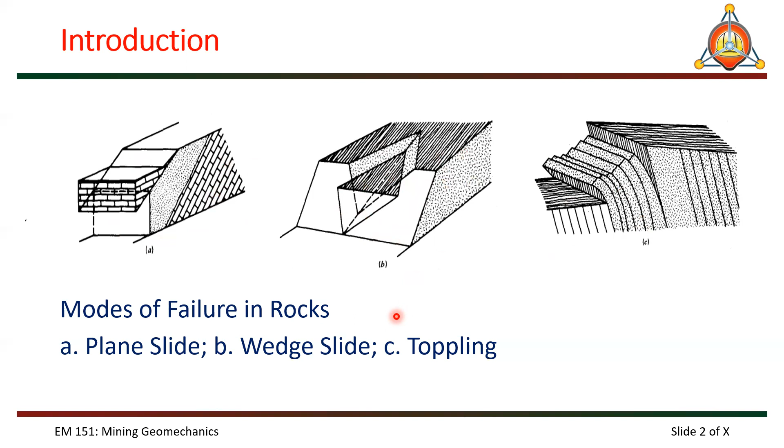This is where our kinematic model analysis comes in. Because when there are sets of discontinuities, we use kinematic analysis to anticipate or somehow predict the likely pattern of possible slope failure.

Let's discuss one by one the modes of failure in hard rock. Let's start with the plane slide. In order for a block of rock to slide along a plane, these are the conditions: when a rock rests on an inclined weakness plane that daylights into free space.

What do you mean by daylights? It means it's not hidden. Like this one, see - this block, if you can see, really comes from here, so it's really connected there.

But since this is a discontinuity, a plane of weakness, then it can move downward - it can slide here. This is because there is free space below it. If this space is blocked, of course it has no space to move, so it won't move.

So it only moves when there's free space. And the inclination of the plane of slip must be greater than the friction angle of the plane. Friction angle is a property of the rock. So if the inclination or the steepness of this plane is greater than the friction angle of this rock, then that means it can fail or slide.

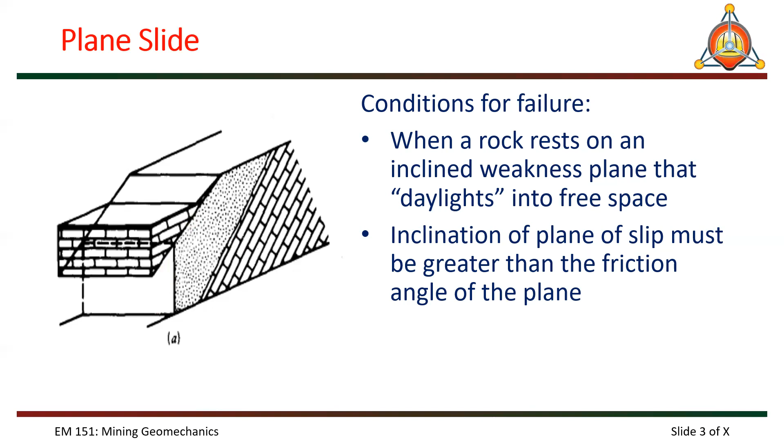Next, we have wedge slide. For wedge slide, the condition for failure is when two planes of weakness intersect to define a tetrahedral block. So this is a tetrahedral block, and its two planes of weakness are these.

First, this one, which dips in this direction. Wait, let me draw. So this is the first plane of weakness - it extends here, and then it dips towards here. And the second plane of weakness is this one - it extends here, dipping in this direction.

So if these two planes of weakness intersect, then they form - since the intersection of two planes is a line - they form this line. And if they form this line, then they can form a tetrahedral block that can slide downward.

And the second condition is when the line of intersection daylights into the excavation - so there should be no barrier, no barrier rock there, because if there's a barrier, the tetrahedral block can't move or slide down. And it should also be sliding downward, because if it goes toward the other side where there's still intact rock, then it won't slide down. So those are the two conditions for failure of wedge slides.

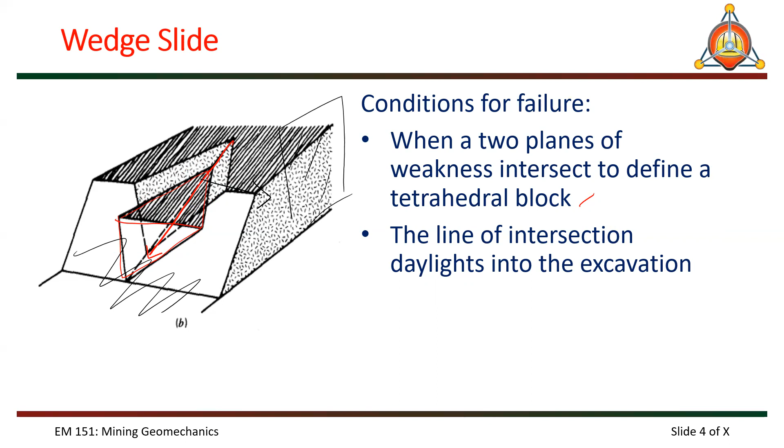Okay, next is toppling. The conditions for failure are these two. First, it involves overturning of rock layers inclined steeply into the hillside. So our rock layers, as you can see here, look like a loaf of bread. We have a block of rock, and the incline is steep, almost vertical.

The second condition is that layers tend to bend downhill under their own weight. If the layers are heavy enough that they can't support the weight of the one next to it, it will bend downward. So the first few layers are the first to bend. Since nothing supports the weight of the one beside it, even if it's still upright, since the others have already bent, it will also tend to bend. Then one after another, until we have a toppling failure.

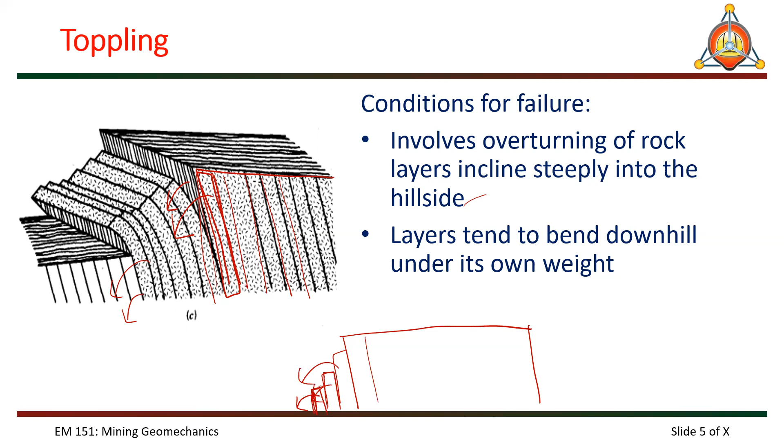That being said, let's discuss kinematic analysis. What is kinematics? Kinematics is the motion of bodies without reference to the forces that cause them to move. So here we focus on the directionality of our rock layers.

Many rock cuts are stable even if they are on slopes, even if they contain steeply inclined planes of weakness, and even if the rock strength is low. This happens when there is no freedom for the block of rock to move along that weak surface. As I mentioned earlier, it only slides if there is no barrier. If there is a barrier, it will stop the block from sliding down. So even with low rock strength and a very steep incline, it may still not move.

It is only when we remove that blockage that it has the potential to fail. So our analysis here, using kinematic analysis, will focus on the directionality of this discontinuous rock to make sure there is always a blockage to prevent potential failure blocks. We won't focus yet on the strength of rocks in this section.

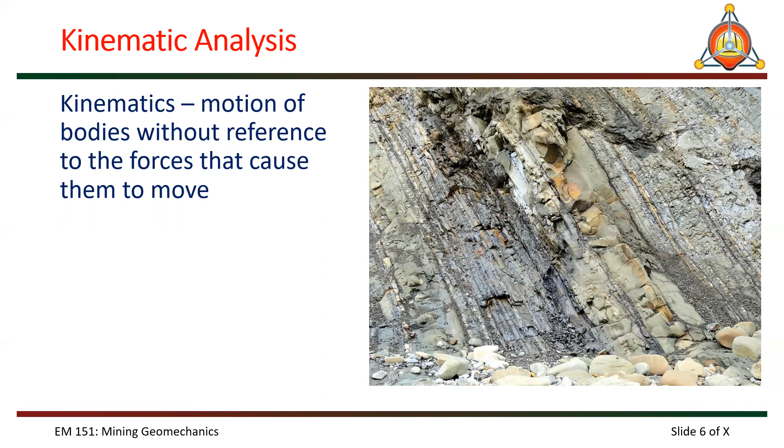To do kinematic analysis, we must be familiar with these basic line elements in the rock mass: the dip vector, normal vector, and intersection vector. There is a separate lecture detailing these elements and how to represent them on the stereographic projection, so you might want to review that. Let's review these three basic line elements.

We have the strike and dip for our planes of weakness. The strike and dip have two elements: the strike vector and the dip vector. This is the strike vector, lying on the great circle. And this is the dip vector, pointed down the dip of a weakness plane. If you have a weakness plane, here is your strike, and your dip is pointed downwards on your weakness plane, bearing at right angles to the strike and plunging with angle delta from the horizontal.

From the horizontal, the angle is delta. We also have the normal vector. The normal vector is pointed in the direction perpendicular to the plane of weakness. So if this is our plane of weakness, the normal vector is pointed towards it. Let me change the color.

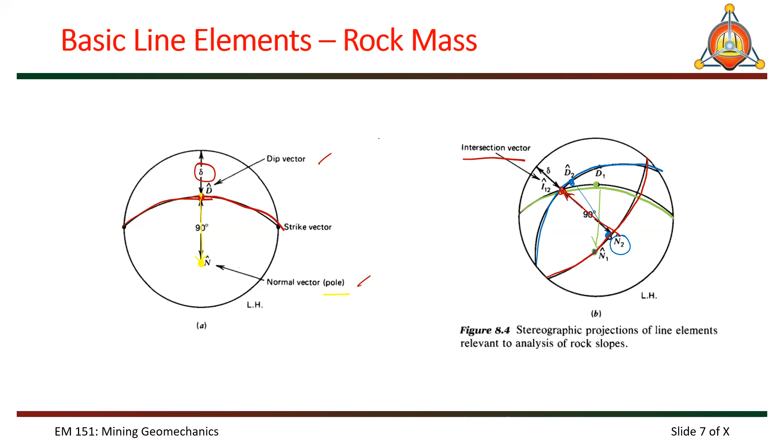So once these are known, the dip vector, the normal vector, and the intersection vector, then we can do the kinematic analysis for rock slopes.

All right, so let's go now to the kinematic test for plane failure. The requirements for sliding in plane failure: first, there is a space to which the rock can move, and second, the angle of our cut, alpha, must be greater than delta, which is the angle from horizontal of the plane of weakness. So sliding requires alpha greater than delta and no blockage.

So in the stereographic projection, how do we put these requirements? First we draw the great circle of the cut slope. So this is our cut slope, and this is a plane, which we can represent in the stereographic projection.

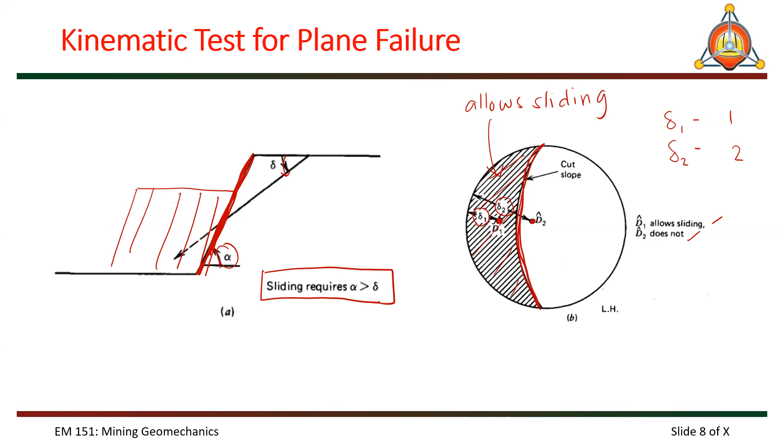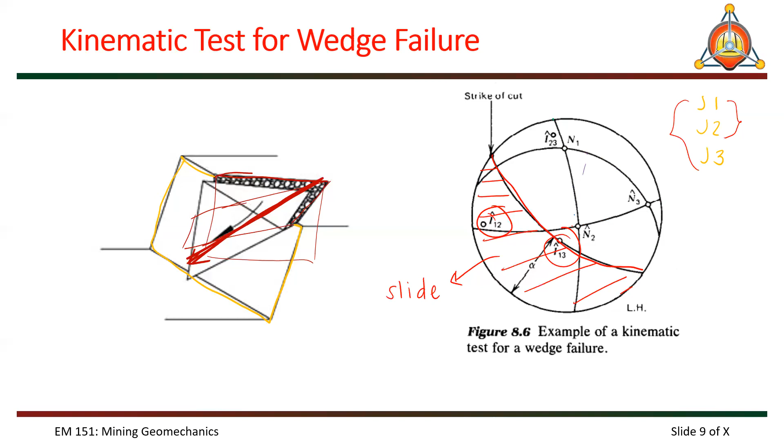So these shaded regions have the potential to slide. What's here? The intersection of 1 and 2, and the intersection of 1 and 3. So the joint set pairs 1 and 2 can fail, causing wedge failure. And 1 and 3 also can cause wedge failure. So the combination of 2 and 3 is safe for wedge failure. Okay, that's it.

And lastly, for toppling failure, interlayer slips must occur before large flexural deformations can develop. So sliding will occur in this plane if this condition is satisfied: 90 minus delta plus phi sub j should be less than alpha. This alpha here is the slope from the horizontal of our cut slope.

And phi sub j is just the internal angle of friction. Then delta is just the angle from the horizontal of our layers. Usually these layers are parallel to each other since it's one set of discontinuities, so this delta should be the same throughout. So again, sliding will occur if 90 minus delta plus phi is less than alpha.

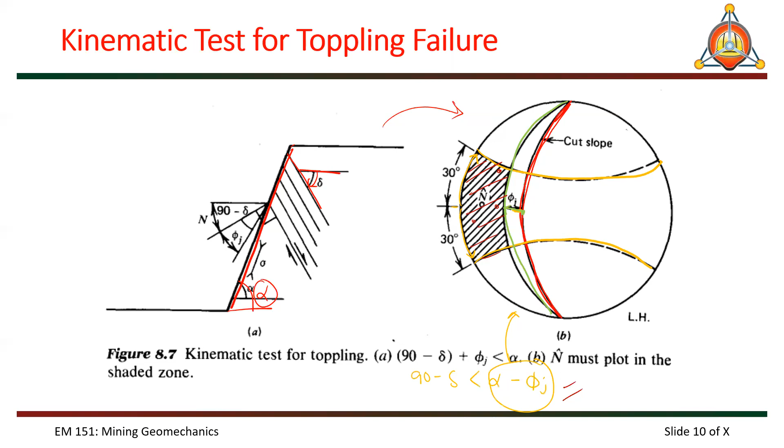Okay, so again, the steps: first, gawin mo na yung great circle of the cut slope, then gawa tayo ng small circles na 30 degrees within the cut slope. Then gawa tayo ng great circle also ng phi galing sa cut slope, and i-shade natin yung part na to. So that's for toppling failure.

Lastly, for sliding due to self-weight: failure can occur if yung surface natin dips steeper than the internal angle of friction, yung phi sub j natin. For wedge failure, any roughness of the planes of weakness adds considerable strength, so in fact it can often incline considerably steeper than phi sub j without wedge failure.

Okay, so to do the test: for sliding, ito yung gagawin natin, and for toppling, ito. For sliding, una natin gagawin is to draw a small circle of radius 90 minus phi, yung ating internal angle of friction. From the center, determine natin kung saan yung 90 minus phi, then using your compass, mag-draw ka ng small circle around it. Yung outside the circle contains all lines plunging less than phi sub j, so walang failure na mangyayari dito. Yung inside the circle, dito yung failure.

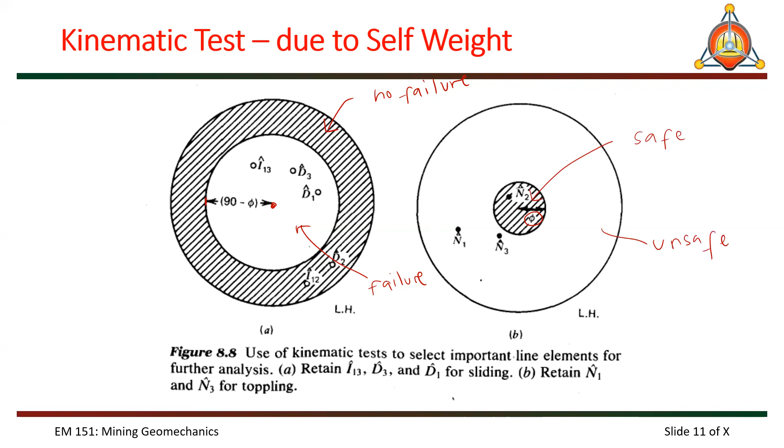So, kinematic analysis can be done. Isa sa mga actual application ng kinematic analysis is in an open pit mine. Since we are excavating in different directions, lahat ng directions mapupuntahan natin kasi yung ating pit ay pa-circle usually. So there would be parts na more prone to a certain type of sliding than others, depending on the direction of our discontinuities na present. If we perform the analysis on those different directions, we can notice na our pit will have different minimal or maximum safe slope angles.

So in this example, yung assumption natin is circular yung pit shape natin. Although usually hindi naman to nangyayari na perfect circle talaga, pero just for the sake of illustration, yung ginawa dito is from the actual north na direction, nag-move yung analysis 15 degrees clockwise or counterclockwise, until makabalik siya sa north. So meron tayong 360 over 15 na number of analysis na ginawa.

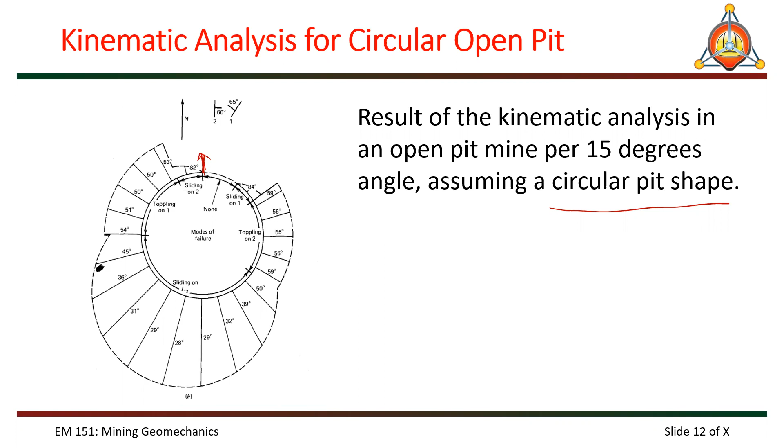At each of those parts, ginawa natin ng sliding, plane sliding, wedge sliding, at toppling na analysis. Tapos tiningnan yung safe angles or minimal safe angles, and from that, tiningnan kung ano yung maximum na safe slope angle of that specific direction. So ito yung parang tabular form of the data.

So we have here dalawang joint sets. Joint 1 strikes daw at north 32 degrees east, and the other joint strikes north south. Tapos we have here our dip vectors, and also our intersection vector. Lahat ng ano doon, so we have north, 15 east, etc., until bumalik sa, until na tapos niya yung full circle - parang different directions all throughout the circle with interval of 15 degrees.

In-analyze niya yung for sliding, for joint set 1, for sliding also ng joint set 2, and then for wedge sliding naman ito kasi intersection na siya - wedge sliding due to 1 and 2, toppling for 1, and toppling for joint 2. Tapos tiningnan natin dito kung ano yung angle sa lahat ng to, sa lahat ng analysis na ginawa per direction, per strike of cut direction.

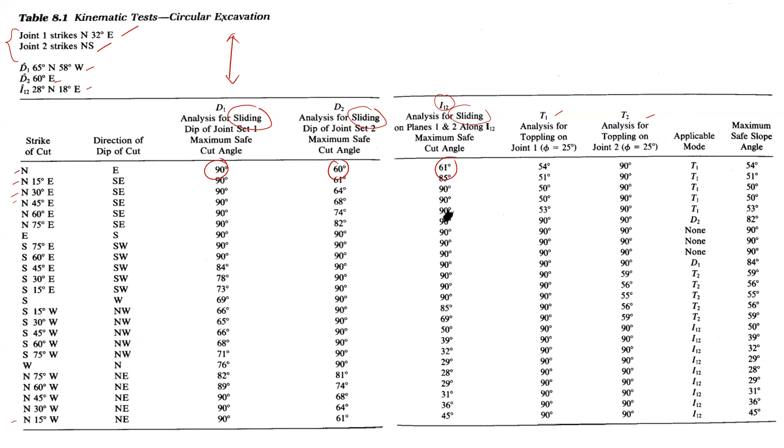Tiningnan kung ano yung pinakamaliit na safe slope angle. For example, dito sa north, meron tayong 90, 60, 61, 54, 90. So ano yung pinakamaliit sa kanila? Eto, di ba? So most likely, kung meron mang failure sa strike na to, na north, then most likely yung unang failure na mangyayari is the toppling on joint 1. So that's why yung applicable mode dito is toppling on joint 1. Tapos yung maximum na safe slope angle is 54, so hindi natin gustong tumaas sa 54 kasi kung tataas tayo dun, magkaka-toppling failure na tayo.

Ganun din yung ginawa sa lahat ng strikes na to - tinignan kung ano yung pinakamaliit na safe slope angle, at yun yung likely na failure na mangyari sa direction ng cut na yun. Kung ano man yung safe slope angle doon, then that would be the maximum safe slope angle na. So, hindi tataas sa 54. So that's it for the kinematic test for an open pit mine or a circular excavation.

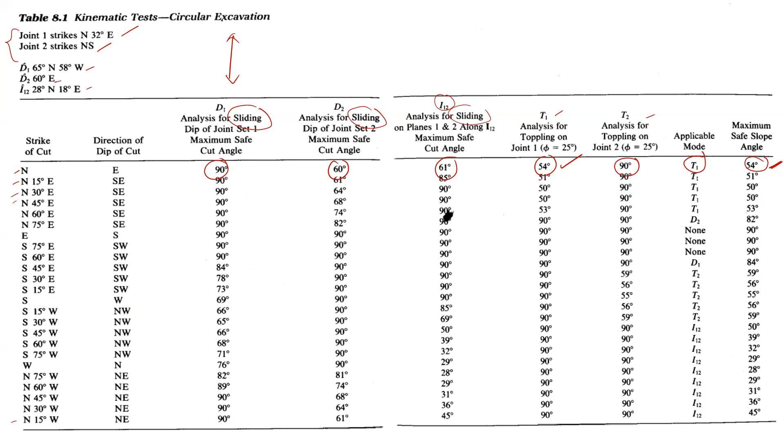Let's move on to the analysis of plane sliding using stereographic projection. So let's start with plane sliding. According to the definition of an internal angle of friction, a block will remain at rest on a planar surface if the resultant of all forces acting on the block is inclined with the normal to the surface at less than phi sub j.

Okay, so this is our block, and this is our plane, right? So the normal to our plane is this line.

So this block will remain at rest if the angle of the resultant vector does not exceed phi sub j. So this is the condition for sliding: the angle of the resultant from the normal should be smaller than phi sub j para hindi siya mag-slide. Kasi pag sobra na yan sa phi sub j, for example nandito na yung resultant vector, then this block would slide na.

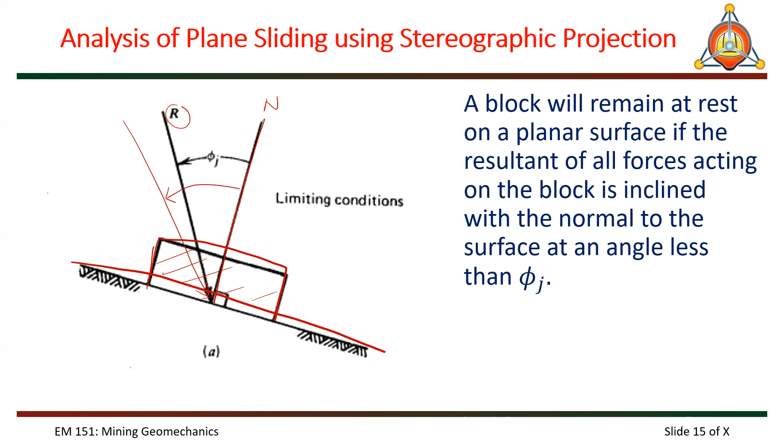So para i-analyze natin yun, kailangan natin gawin yung steps na to. So the first step that we will do is to plot the normal to the slope cut.

Okay, so if we have a plane of weakness, then we have a slope cut. Yung normal doon, ipo-plot natin sa ating stereographic projection, sa stereo net natin. Okay, so this is the normal to the slope cut.

And then determine natin yung phi sub j. So ano ba yung phi sub j of the rock? And then magdodraw tayo ng small circle around n hat or the normal vector with radius phi sub j. So gawa lang tayo ng small circle, at ito na yung parang friction angle natin.

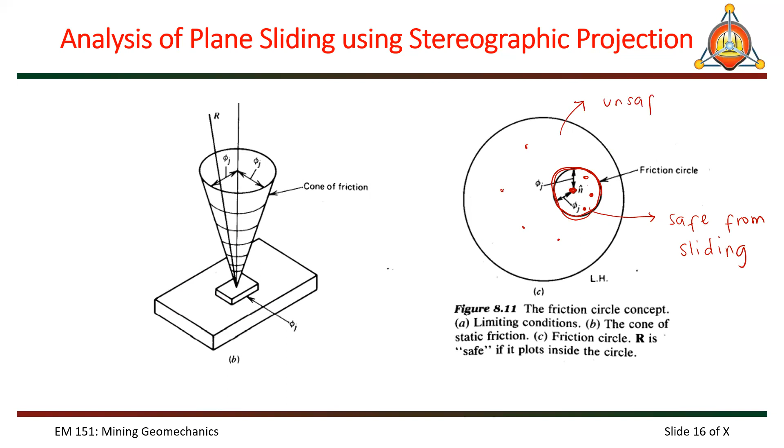So sa loob nito, kung yung resultant vector ng lahat ng forces na na-apply sa block ay ma-plot inside the circle, then that means it's safe from failure or from sliding. Pag yung resultant naman plots outside this circle, this friction circle, then ito yung unsafe.

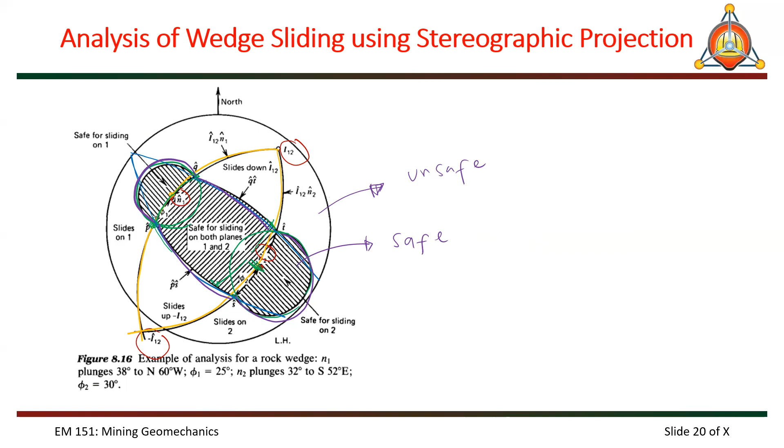Okay, so kung naguguluhan kayo, follow nyo lang yung instructions na to, and I think gagawin nyo rin naman ito sa lab.